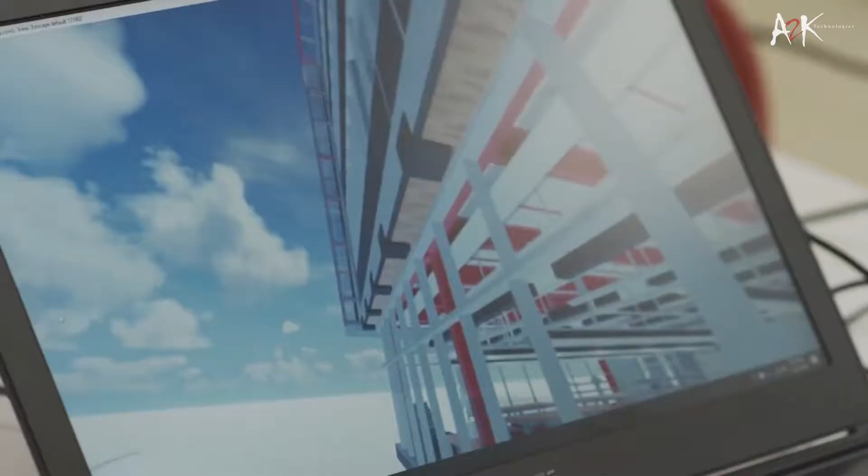Firms might once have kept information close in the name of differentiation, but we are seeing more of a collaborative spirit in the industry. Let's take a look at the 3 ways digitalisation fosters a collaborative culture in architecture.

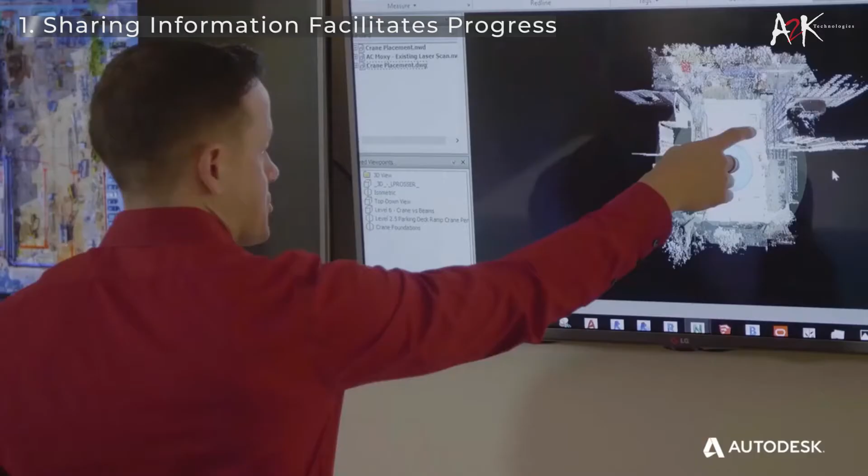Sharing information facilitates progress. Project delivery is not a linear process, but it's often presented that way. In reality, many aspects of it are often cyclical, and therefore the opportunities to share information are rich.

An architect's expertise is crucial to a project, however it is limited. An additional insight of a contractor earlier on would be a huge benefit, as it would help them further educate on constructability realities. It would help them avoid design-to-build pitfalls.

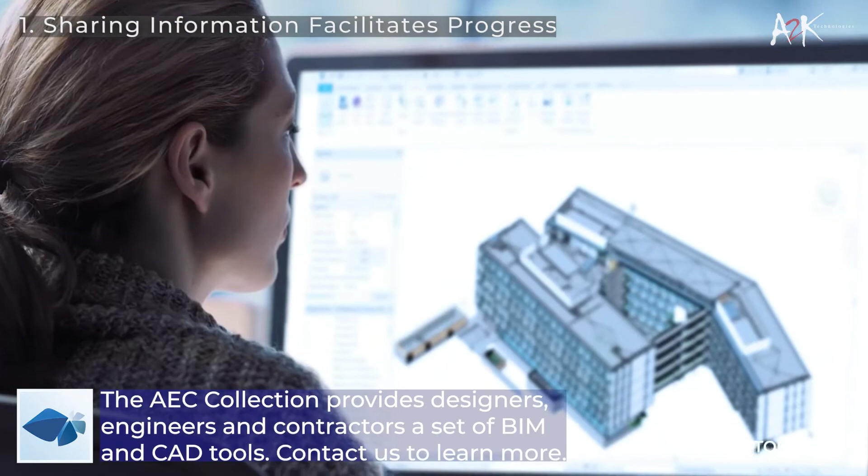When computer modelling first became part of design, it required such a massive investment of technology, time, education, and content building that firms were reluctant to share information. Now, the technology has evolved to a point where nearly everybody in developed economies can access it.

Information is power when it's shared, not when it's kept. That's when we start to evolve and improve upon each other's knowledge. Being able to free resources up, it's ultimately going to benefit the actual product, whether it's a building or a city.

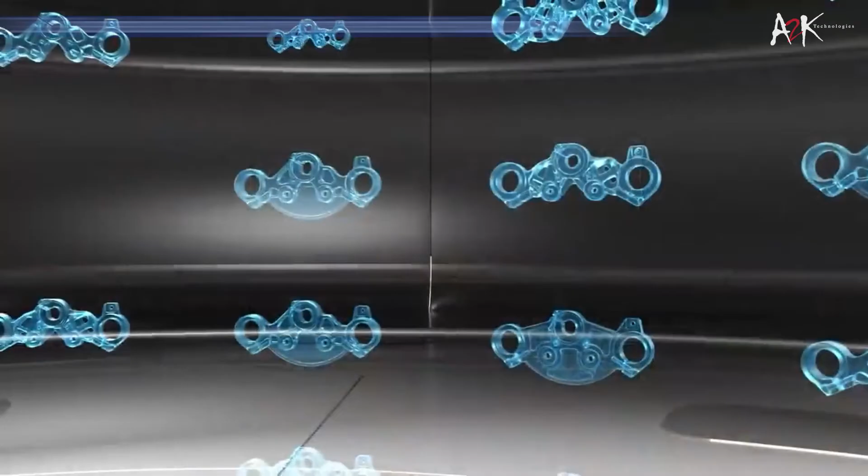Generative design enhances productivity. Generative design uses software to create multiple design solutions based on specified data and constraints. Some say it's the future of the design and construction industries.

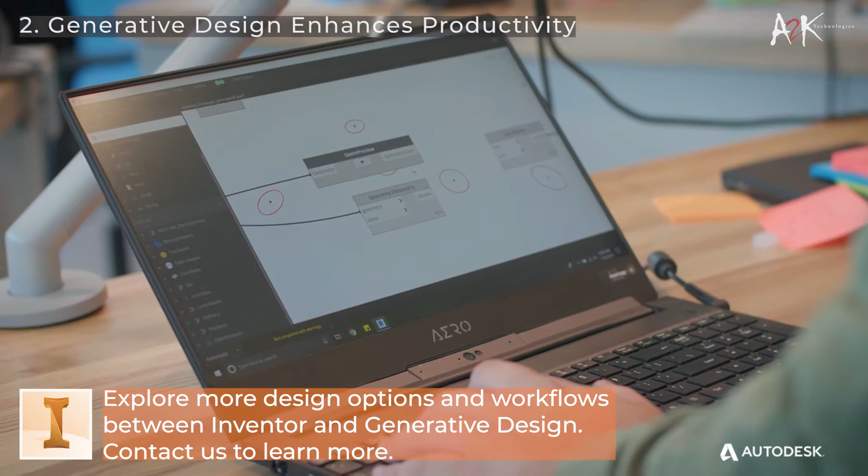However, some architects and engineers are resistant to change and harbour fears that generative design means robots will soon take over their jobs. The truth is that generative design can improve efficiencies and is a way for designers to bring value to a project. It is in their best interest to be participants in determining what's going to be generative design related, what's going to get automated, and what's not.

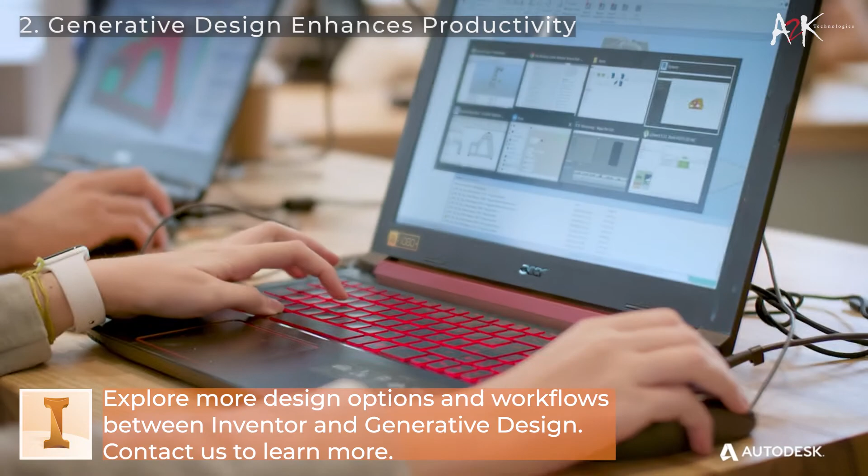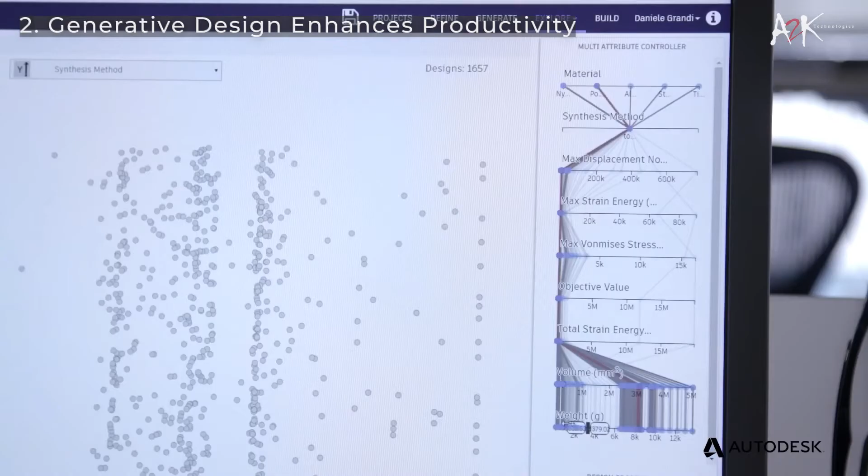For example, needing to calculate parking spaces for a site. Is a high-demand designer really needed? No. The computer should do it algorithmically instead. It can sort through information, formulas, goals, and constraints, and generate a multitude of options that can be selected.

Generative design can be both tactical and practical. Designers will continue to be in the driver's seat. One of the roles of an architect is managing client expectations, something they wouldn't want to leave up to the computer.

Visualization software is here to stay. Designers are trained in a vocabulary of drawings. They can present building sections and elevations and convey what they represent to project stakeholders.

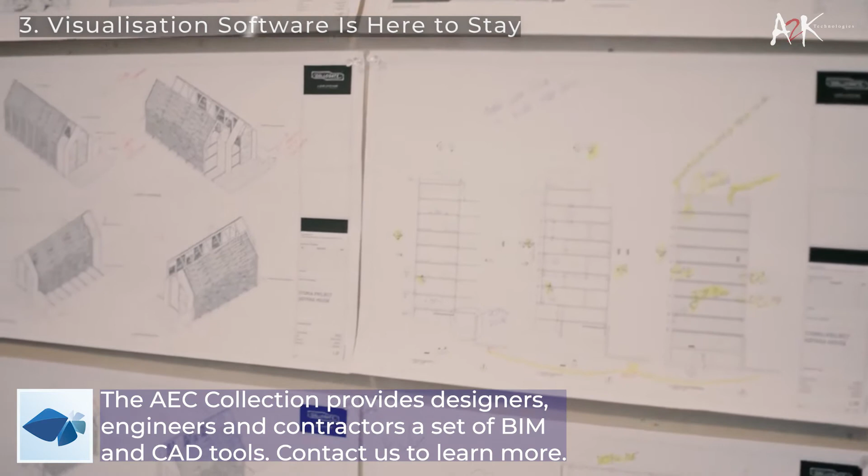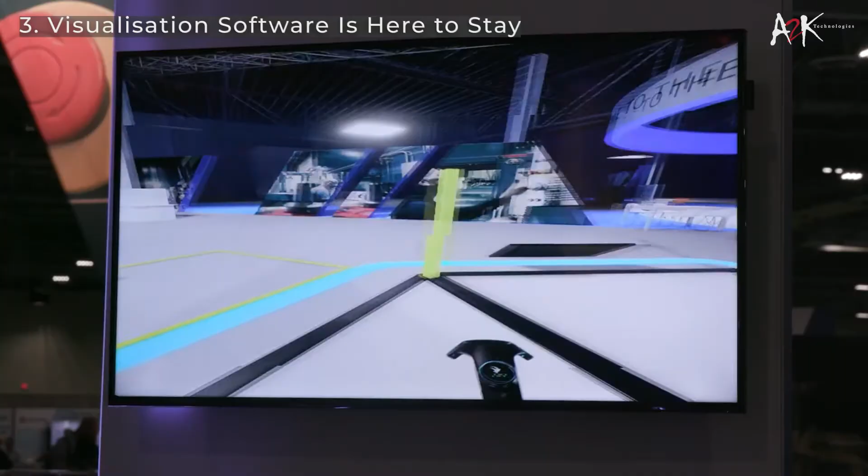But immersive visualization platforms, virtual reality, augmented reality and the like improve dialogue with clients and project partners. With the advent of technologies like virtual reality and augmented reality, designers can say to the client, "Here, please try on these goggles." You can walk in the space and see if the ceilings feel too low or if the width of the hallway feels right.

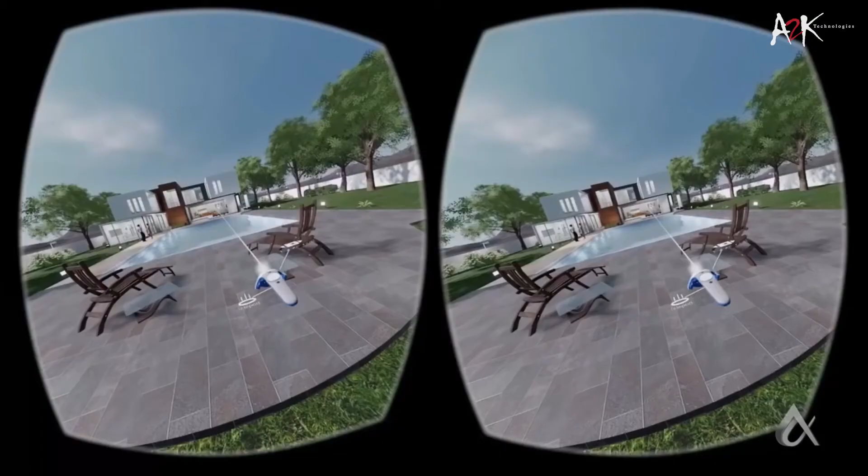This allows the client to really experience the design. It gives them a much louder voice to say this works and this doesn't. They become a further part of the design process.